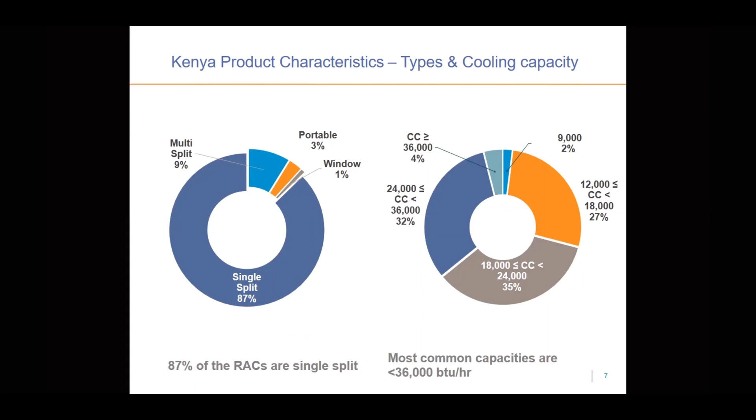So the situation currently in Kenya is that importation of ozone depleting substances like HCFCs is regulated, but only when you're bringing in the refrigerant itself. But the appliances that contain these refrigerants are not regulated. So they give licenses and quotas for importation of the refrigerant, but they don't look at the ACs or fridges or appliances coming in that might contain these refrigerants. And there was a very small portion of ACs that were using R32.

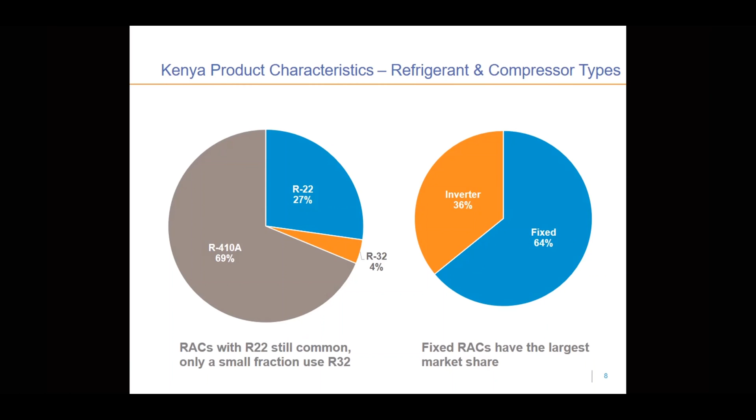So to set the stage for the policy analysis in Kenya, I'm going to take you through how the regulatory framework is set up in the country so that you can understand the coming slides. So we have two main implementing agencies. We have the Kenya Bureau of Standards, which is under the Ministry of Industry, Trade and Cooperatives. The Bureau of Standards develops, revises and publishes the standards. So they were in charge of developing the standards in 2013, the MEPS document and the test method. And they also manage PVOC implementers. I'll explain what that is in a moment. And they also do some market surveillance to check whether the products that are actually in the market meet the standards that they have set.

So the PVOC companies, PVOC stands for, that has a little error there, pre-export verification of conformity. So that means that because Kenya is mostly an import market, we need to check the products that are coming in. So instead of checking them at the port, which would cause a huge backlog, you check them at the country of export. So KEBS has contracted 5 PVOC companies that check products especially in the main export countries like China, Dubai, and so on. So those are part of the framework because they check that the products meet the standards in the country.

And then on the other hand, you have the Energy Regulatory Commission, which was actually renamed to the Energy and Petroleum Regulatory Authority, but the roles remain pretty similar to what they were before. So the ERC, or EPRA as they're called now, inspects the test reports for units that are regulated for efficiency, and they issue appliance registration certificates and labels, and they also conduct market surveillance, especially on labeling. And they're under the Ministry of Energy. So next slide, please.

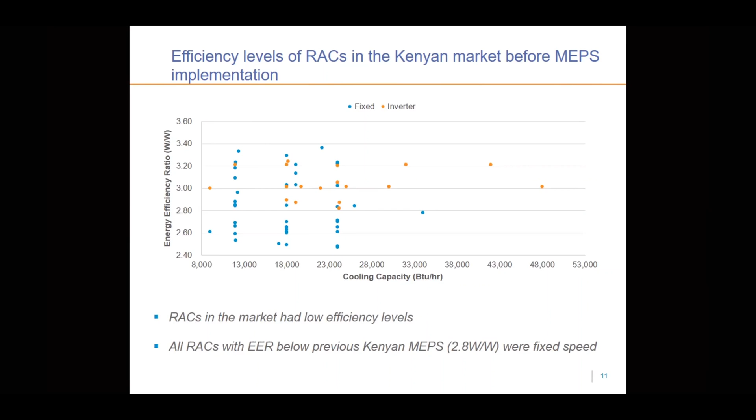So moving to the next slide. So analyzing the impact of what are now the newly adopted MEPS, you can see that the level moved from 2.8 watt per watt to 3.1. So as they were revising the test requirements, they also decided to increase the MEPS levels, because the standard was already pretty old by the time it became mandatory. It was already five or so years old. So they increased that by 11% to 3.1. So you can see that you had a lot of fixed speed room air conditioners that did not meet the previous MEPS, but there were even more that did not meet the revised MEPS. Next slide.

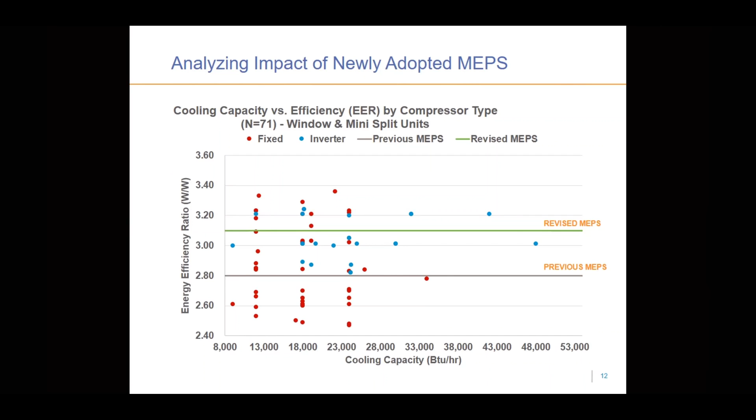So this is just to show the significant market transformation that has happened because of the implementation of the new MEPS. So before, 30% of the models that were in the market in 2018 would not have been compliant with the previous MEPS. But with the new MEPS, you have 73% of the models that were available in the market in 2018. And even then, the ones that were in the market in 2018 would only be 1 or 2 star. There would not be any 3-star units. Next slide.

Okay, so looking at 2 policy scenarios that we used to show the impact of implementing what were then the proposed MEPS that are now the newly adopted MEPS. And the other scenario was what we called the potential best available technology. So the second scenario involved increasing the current MEPS by 20% to 3.75 watt per watt, with the assumption that since this is a newly regulated market, after the MEPS are implemented, the most efficient units will have that efficiency level, which would be equivalent to 3 stars under the current star rating categories.

So just to show the huge difference between the energy savings from the current MEPS in 2030, and if they increase that by 20% to 3.7 watt per watt. So that's 59 gigawatt hours in 2030 versus 203 gigawatt hours for potential BAT. Next slide, please.

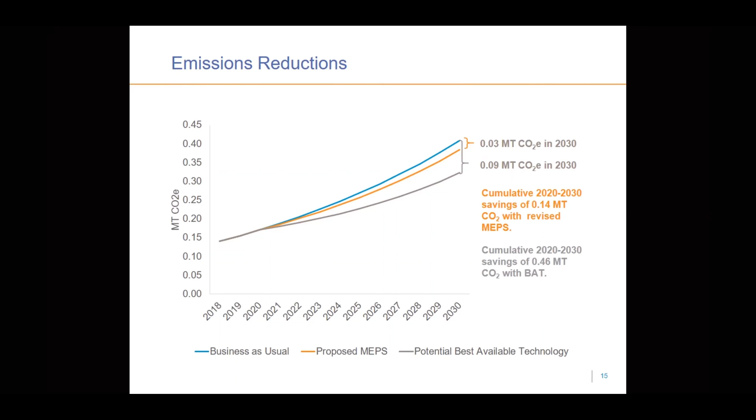So these were the recommendations that we gave based on the evidence that we just presented. So the first one would be to implement the proposed MEPS levels. So this was already done, which is great.

So under this scenario, the consumers still get significant life cycle cost savings, and the payback period for the units is less than 3 years. And then at the national level, you have 4% less cumulative energy consumption by 2030, and cumulative avoided emissions of 0.14 metric tons of CO2, as we just saw on the previous slide.

And then the second recommendation would be to update the MEPS and labeling schedule every 2 to 3 years, at most 5 years, to continue the market transformation. So taking into consideration that Kenya is an import market, and we're importing units from countries like China, which will probably revise their MEPS in the next few years, and other larger economies. Well, this is a great first step. It's important to continue revising and updating those MEPS every few years.

And then the third recommendation would be to conduct a comprehensive consumer awareness campaign that sensitizes the public on the new labeling program for RACs. Because this is a new S&L program, it's important to let the public know that these are the different efficiency levels, and these are the benefits of getting a high efficiency unit as opposed to a low efficiency unit. And this will also help with market transformation.

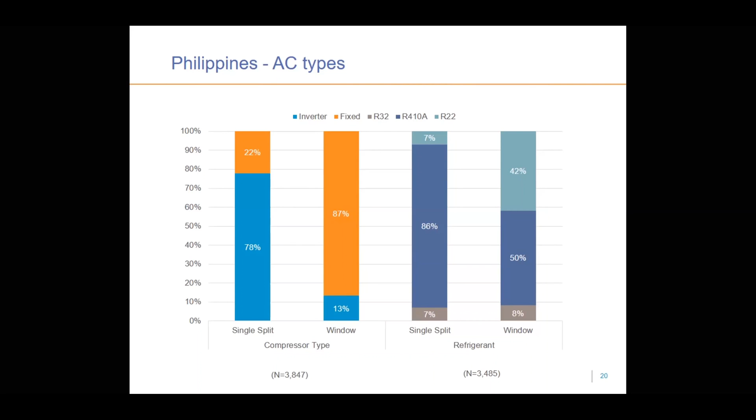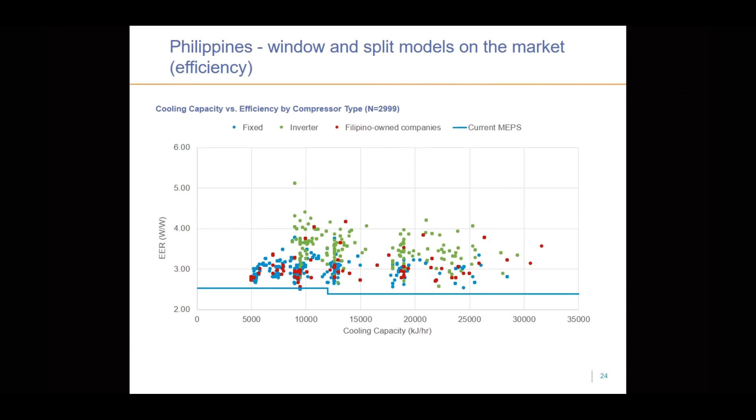The analysis showed that the 2020 ASEAN target MEPS would eliminate about 30% of ACs on the market, but it will not result in market transformation, because on average, the EERs of ACs on the market are already greater than the ASEAN target MEPS. Therefore, our recommendation is to increase the MEPS to 20% above the ASEAN target scenario to spur market transformation to more efficient appliances and have a greater policy impact.

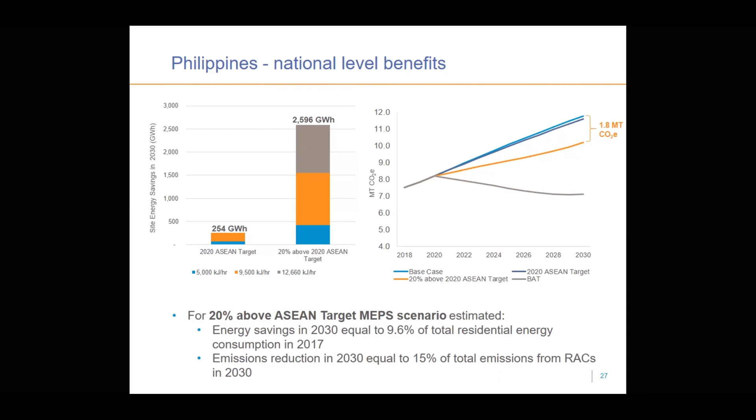In regards to impacts to local manufacturing, as Loli mentioned, the air conditioner market in the Philippines is dominated by fixed speed window units, which is unique in Southeast Asia. During the study, we found that, like Loli mentioned, Filipino households favor small size window units that are less expensive, but they may also be less efficient.

Two Filipino-owned companies, Concepcion Carrier and Koppel, that manufacture mainly fixed-speed window units, have quite large market shares, and the products are very highly valued by residential consumers. During our analysis, we estimated that under the more ambitious scenario, about 87% of surveyed models that are manufactured domestically would be non-compliant, which is a very significant impact on local manufacturing.

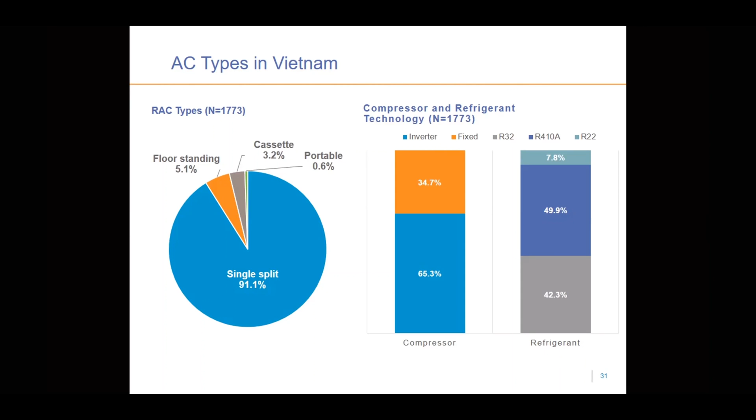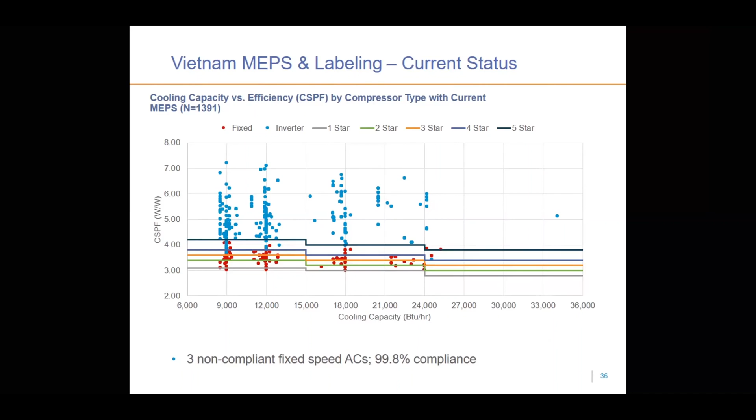So what all of this tells us is that the Vietnamese market is primed for some policy revisions. So what we recommended in our report is that Vietnam increase the MEPS for split ACs by 20% above the current MEPS. Additionally, we recommend that they revise the energy labeling schedule, those 1 to 5 stars, upwards across every level. This will help to kind of normalize the distribution a bit.

And if they wanted, they could consider using a statistical normal distribution to help better distribute models within the market. Additionally, our third recommendation is that Vietnam commit to updating the MEPS and labeling schedule every 2 to 3 years to accelerate market transformation towards highly efficient ACs and just to better help consumers.

So what we modeled was that 20% increase to MEPS. What you can see here on this chart is what the current MEPS look like, what we saw in a previous slide, as well as what the market would look like with MEPS set 20% higher.

As you can see, the majority of those lower efficiency fixed speed units drop off the market, although some fixed speed units do remain in the market and would still be compliant, and they would probably fall into that 1 to 2 star range. Based on this scenario, 22% of the most inefficient ACs would be eliminated from the market.

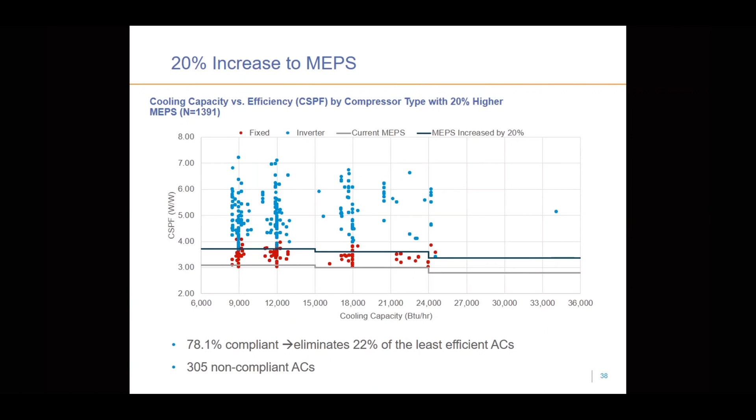So in addition to talking about impacts to the market, we also want to look at impacts to manufacturers. As I mentioned earlier, there are about 6 local manufacturers in Vietnam, one of which, Funiki, which operates under the Hoa Phat brand, is no longer going to be producing ACs in the future. Based on our analysis, we found that 20% of the locally manufactured ACs from our retail study would be non-compliant under a revised policy scenario. However, this is comparable to the impact that foreign brands would face, where 23% of those ACs would be non-compliant.

And one of the things we'll be talking about later when Caitlin presents about the World Bank technology transfer projects is that there are opportunities to reduce the burden of these types of policy revisions on manufacturers. And the work that the World Bank is doing could be very complementary to a policy revision.

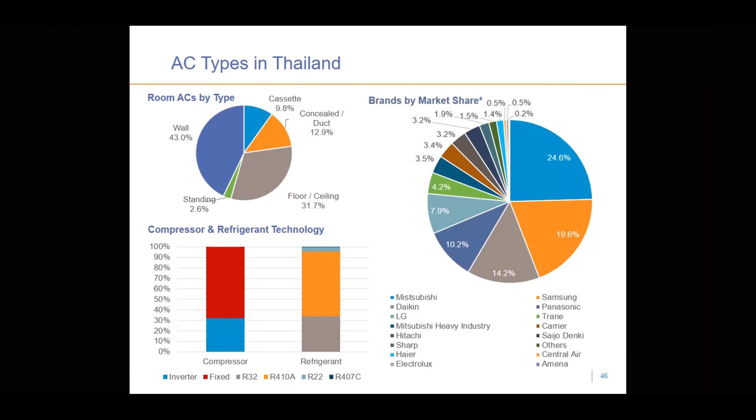One thing that's excellent about the Thai market is people really appreciate energy efficiency. The voluntary EGAT number 5 label program is very well recognized, and people use it as an important criteria for purchasing an air conditioner. First of all, consumers consistently say that energy efficiency is the most important factor in selecting an air conditioning unit, and they judge energy efficiency based on this EGAT number 5 label.

Something to note about the EGAT number 5 label, it's supposed to be a comparative label that goes from level 1 to 5, with the top and most efficient level being number 5. However, it's a voluntary program. So for label levels 1 through 4, manufacturers don't typically ask for those. They only label their units if it achieves the number 5 label.

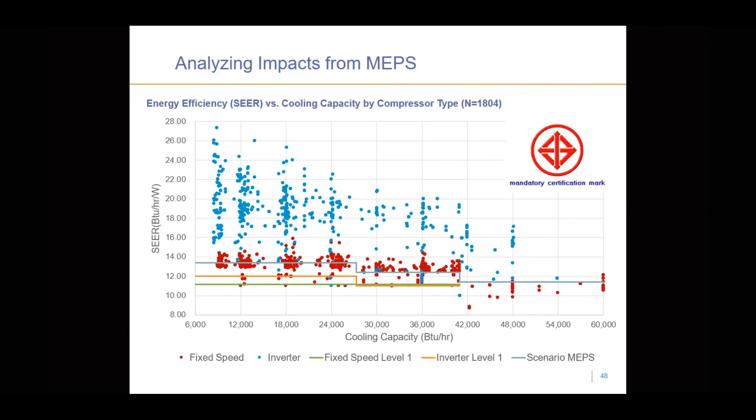Now, the EGAT label number 5 is probably the most important energy efficiency policy in Thailand. As you can see here, most of the units on the market achieve the EGAT number 5 label. One of the perhaps unfortunate things about the label is that it has separate requirements for inverter versus fixed speed units. And probably the reason for that is that many of these fixed speed units that can only achieve the fixed speed label number 5 are made by Thai companies. And so it's important, given the importance of this industry for the Thai economy, that these manufacturers are not adversely affected.

And so they've kept a lower stringency level for fixed speed units in order to allow these companies to continue competing in the market. However, this has slowed the transition to inverter units and allowed a lot of these less efficient fixed speed units to achieve this label number 5 and appear as if they are as efficient as these amazingly efficient, fantastic inverter units. There's a wide range of efficiencies on here. And frankly, I don't think you can find as highly efficient units as you find in Thailand at the top level in other markets.

So one of the other great things about the Thai market is there's really excellent economics for energy efficiency. Because there are all of those very high efficiency units for fairly competitive prices, and there's not extremely high, but higher electricity rates than in some neighboring countries, energy efficiency pays off very well. The best available technologies, even for smaller units, pay off within 4 years, which shows that it's quite cost effective, especially when you consider that the average lifetime of an air conditioner is about 10 years. So across the board, energy efficiency pays off.

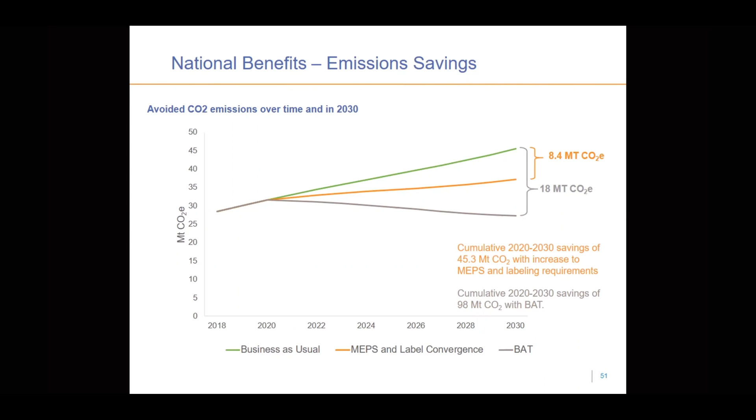So the key things I want you to take away from this presentation is that while the main piece of the market in Thailand is under 20,000 BTUs per hour, those large units that may not have as many sales do contribute significantly to energy use and emissions because they're very large and often inefficient. But they also present a great opportunity for moving to higher efficiency because it's extremely cost effective at those capacities.

The second thing is that the differentiated requirements for the label has slowed the transition to inverter units, and in some sense misrepresents the relative efficiency of fixed speed versus inverter units, as most consumers just use the presence of the label as their criteria for picking an air conditioner. And they may, and indeed are, often choosing less efficient fixed speed units over more efficient inverter units.

However, it's a bit of a challenge to move to a single set of requirements because it would very adversely affect Thai-owned brands. In fact, only at a 20% increase in convergence, only 7% of models made by Thai-owned brands would be able to get the EGAT number 5 label, which would really seriously affect their sales, considering how many consumers use that as their criteria for purchasing. So for that, I think we'll hear from the World Bank about the technology transfer program, which may be able to help those Thai-owned brands produce such products, and then allow us to move to a single set of requirements at a higher level for the EGAT number 5.

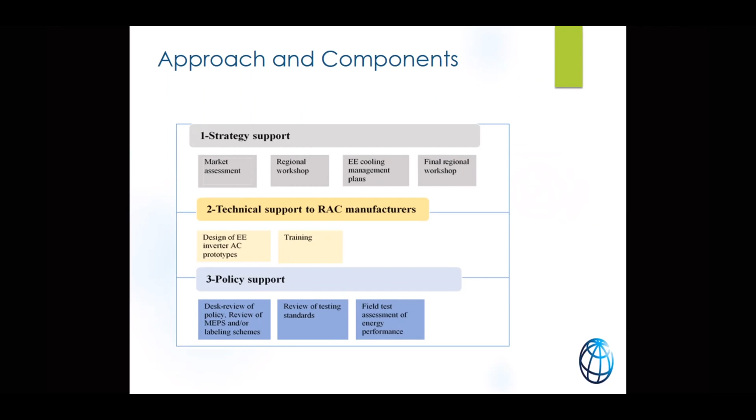producing them themselves. And then on that basis to also provide the policy support, desk review of the policy, the review of the MEPS, the labeling schemes, the testing standards, and then field test assessments of the energy performance so that the energy performance can be reliable, and on that basis then give sufficient confidence to increase the standards. Next slide, please.

Now, if you look at the scope of the energy efficiency cooling management plan, it also has a number of key elements. One obviously is the state of the refrigerant and the energy efficiency technologies by the different sectors, but presenting in an integrated manner, including specifically the technical potential for more climate-friendly cooling. Then the strategy part, which is basically summarizing the analysis, but also prioritize where to start first.

Then to integrate with the existing targets under the HPMP, the phase out, but also the NDCs, in order to really help define the goals and the targets. And on that basis, prepare the action plan and the roadmap. And that should then also include the incentive mechanism. And that includes financing and possible approaches to be able to scale up. Next slide, please.

Now, if you look at the technology transfer, that is really at the heart of the program. That will consist of the access to the intellectual property and know-how, specifically for inverter-based product design and how to optimize the performance. Very detailed training and software, so that the companies can really use the software for the design.

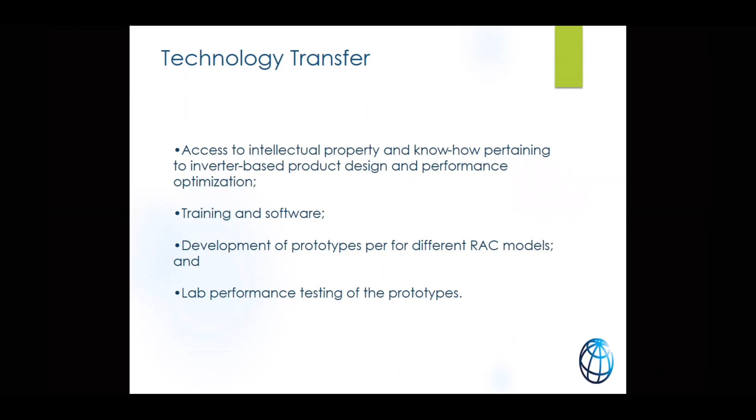Now, again, for the different components and the deliverables and the timetable, if we look at the strategy development, that is really focusing on the energy efficiency cooling management plan. The proposed completion is November next year, which is slightly delayed from the original date in March. Then the policy development with really the recommendations for the policies in the different countries and the regulatory frameworks, that should also be finalized by November next year.

And then the technical capacity development, really that describes the technology and the know-how and how it can be transferred, should be finished slightly before in October next year. Next slide, please.

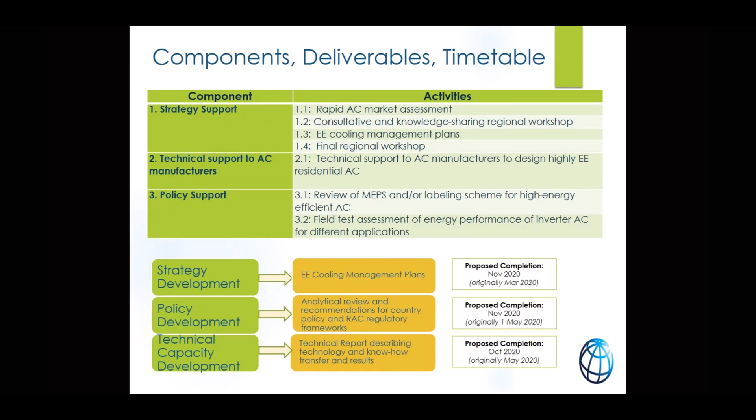The total funding that was approved by K-CEP is channeled through the World Bank under 3 agreements. This is maybe a little bit detailed for the conference for today, but there was one strategy development that was signed in 2018, and then there is the second and the third for the technical capacity development and the policy development, which should be countersigned pretty soon.

Now, if we look at the country participation, we obtained endorsement both from the Ministry of Environment and Natural Resources and the Ministry of Industry and Trade in Vietnam, as well as the DIW and Ministry of Environment in Thailand, and they were secured in March. Now, if the technology transfer is successful, then the governments will adopt a plan that really commits to using lower GWP refrigerants, and also increase the MEPS by 20%.

Also in Vietnam, we had the meeting together there half a year ago, and they have quite a regular update of the MEPS anyway. But as in many countries, the government is really looking for the analytical basis to justify the potential for the increase. The increase of the MEPS by 20% from the 2020 target, that's also agreed by ASEAN SHINE, and that would be a really good outcome.